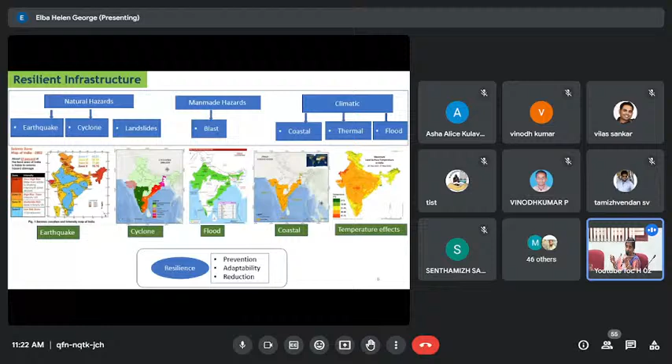Now going into the details of it, when we talk about resilience for earthquakes, choose ductile materials compared to brittle material, which will give more energy absorption to the overall system. So that is one way to bring in resilience for earthquakes in a building.

And there is a trend of using dampers which can absorb the shock or vibration during such events. Also there are some damping devices which are kept in between the floors or columns and beams, which also reduce the shock due to earthquakes. And in some structures we use bracings, and that also will lead to collapse prevention in case of earthquakes. So these are some of the emerging trends which we are practicing to bring in resilience for earthquakes if the structure is already built.

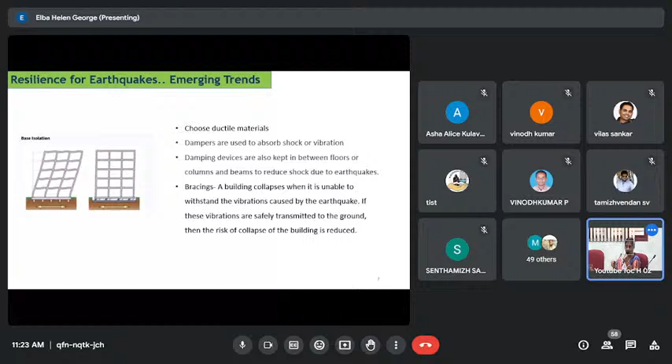Now cyclone. This cyclone aspect, if you can have a shape, you can bring in cyclonic resilience by developing different shapes. So this is one such example where CSIR-SERC has come up with cyclone shelters, and it is deployed in Orissa, and I think 23 of such shelters were built along the coast of Odisha. And whenever some cyclonic prediction happens, people used to shift to this kind of shelters.

But the point is, why we have to wait that long to shift the people? Why can't we build this kind of structures for the residences or the buildings which is existing in such kind of cyclonic regions? So that also needs to be emerged.

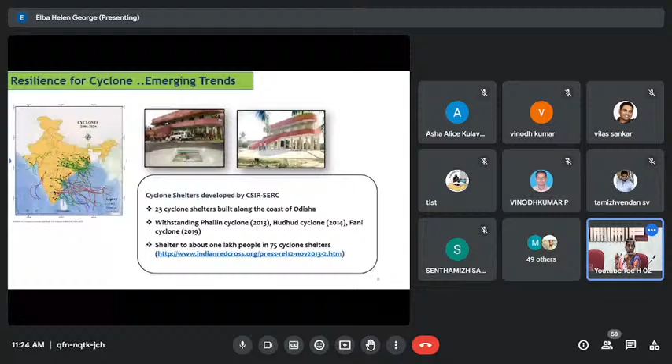Next, flooding, as I mentioned, the stormwater drain. But here good point is, I think till last year, we used to have only this cast-in-place construction practices for the stormwater drain construction. But recently, there is a lot of adaptation of the precast U drains for stormwater drain. And I think in Tamil Nadu, they have done a lot of coverage for the stormwater drain using this precast system in the last 2 years in the Jal Jeevan mission. And in many areas, this has found to be very effective.

So it is also a matter to be checked whether our roads have this stormwater drain passing along, so that flooding will not happen for rains happening in small spells. But in 2020, I think only 25% of the road network were having the stormwater drains. And due to this Jal Jeevan mission, this number has increased. But all across India, whichever state is getting affected by flooding, the stormwater drains need to be installed in a larger manner to tackle this kind of flooding.

Floodgates and flood barriers are not seen anywhere in India today. But in abroad countries, whenever there is a prediction for the flood, they used to just open it up, close it using the floodgates, so that at least some of the houses get protected from the flood events. So that also needs to be adopted and thought about for new innovative techniques.

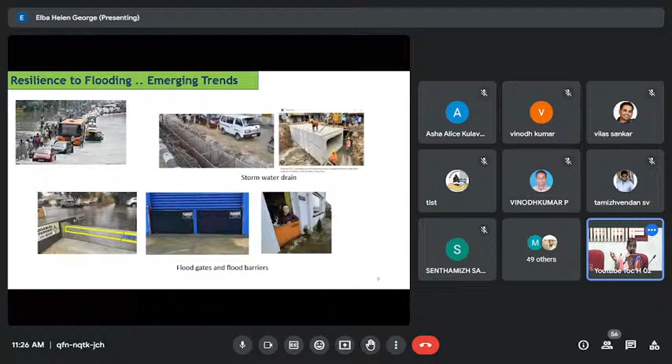Coastal climatic resilience, I'm sure you may be knowing that India has around 7,500 kilometers of coastal line, and 3.5% of the population is residing within 50 kilometers of the coast. So there is a domino effect being experienced by the coastal communities, that is spring tide coupled with ever increasing sea level. You can see in the picture, it's a picture from Ernakulam district itself.

So the salt water is surging inside the homes in coastal areas, and every year they have to do some repair for these walls, floors and all. So what is the solution?

Till now it is not addressed, I have been told recently, and we are coming up with new methodologies to address this kind of problems. Also these communities are using only mud bunds, and that is not effective during this kind of water inundation. So we also need to see how to prevent erosion, as well as how to prevent the water entering inside beyond a particular level. So those need different level of techniques so that this community's overall well-being can be improved.

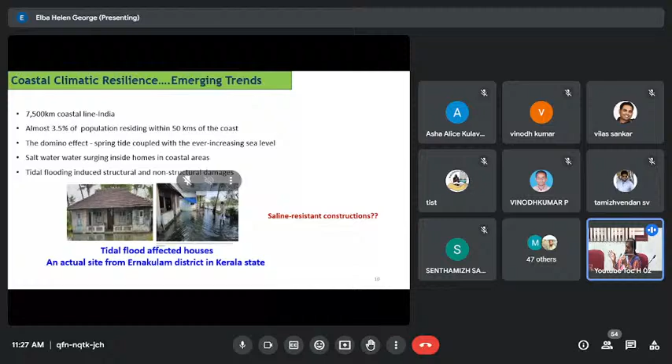So one of the options is saline resistant construction, but you may be knowing about waterproofing, but there is no waterproofing which has saline resistance. So it is not about the chemical, but it is the opportunity for us to come up with new saline resistant concrete in a cost effective manner for construction for these coastal communities.

Thermal climatic resilience, we need to adopt new building materials which have different rate of heat conductance, because if you see the temperature range across various states in India, you can see a difference. So you can choose the construction materials in different manner, which has different rate of heat conductance, and also there are possibilities to build building envelopes and attach to the existing structure or to the new construction, which will lead to thermal resistance. That is also being done in some of the places, and that is also an emerging trend which we are seeing today, and hope it will pick up in a greater manner.

We can also look into the paths which generally transfer thermal energy, mainly foundation walls, joists, and connectors, and bring in innovative methodologies there which will address the thermal resistance. We are very much aware of the dimensions of the brick, but it's not only the brick, there can be other materials also. We can select the area, thickness, and thermal materials which have the thermal conductivity to tackle that particular heat. Smart materials and phase change materials are being seen to provide thermal resistance to many construction methodologies nowadays, but that needs adaptation in our country.

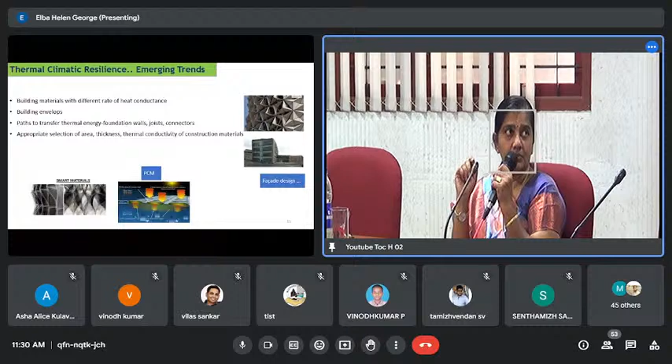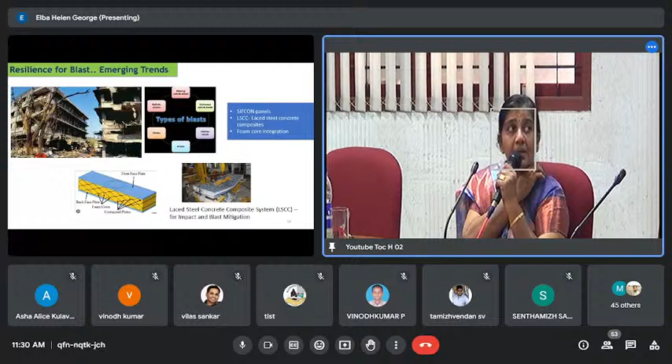Blast, there are many, as I mentioned, there are many types of blast. Some trends or materials you can use in this context: SIFCON, slurry infiltrated fibrous concrete, which has higher impact and blast resistance, and laced steel concrete composites are also there, which research has proven have improved blast resistance because of the more ductility and all. Foam core integration is also seen in literature, and it is claimed that they can also lead to better blast resistance. Next.

Okay, so that was some of the emerging trends. Now coming to the material which I was mentioning, textile reinforced concrete. Let us see how this material can be, we can call it a material for sustainable and resilient infrastructure construction. I'm sure most of you, this material will be new.

To give a brief understanding, it consists of a non-metallic textile. Let me tell you, it is not ferrocement, don't get confused with ferrocement. It uses a non-metallic textile and a cementitious binder. This non-metallic textile can be glass textile, carbon textile, PBO, aramid, and so on. The cementitious binder is not cement sand aggregate, but has cement, mineral admixtures, only fine aggregates, water, and chemical admixture. Here we are not using any coarse aggregate.

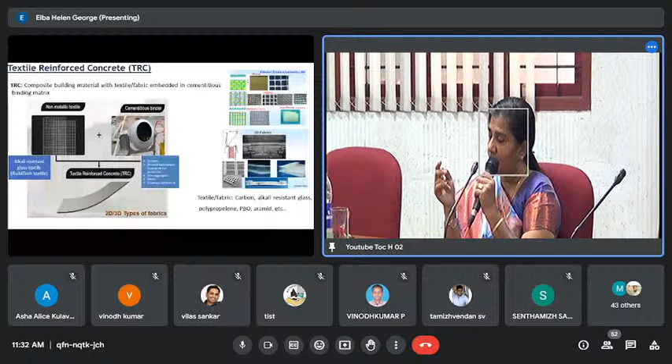Since it is non-metallic, we don't have to provide that minimum cover requirement of 25 millimeter. Because of that aspect, we can build thin elements of particular target strength and ductility requirements for many applications. On the right hand side you can see different types of textiles, like woven textile, knitted textile, bonded textile, and so on. There are both two-dimensional as well as three-dimensional textiles available. In India, we are yet to use three-dimensional textiles, but two-dimensional textiles have already come into certain applications that have mass application in this context.

To give an understanding about the performance of this material: when we talk about RCC, all of us know the Fe415 or Fe250 stress strain characteristics. But when you talk about textile reinforced concrete, it is not about the stress strain behavior of the textile, but about the stress strain behavior of the TRC composite as a whole. There are RILEM and ACI guidelines which are used today to characterize this TRC and see how the stress strain characteristics are, and from that we can derive the design parameters. That is how the design of TRC is done as of today.

You can see three stages of stress strain characteristics in this kind of material: uncracked state, multiple crack formation state, and stabilized state. If you want a conservative design, you have the flexibility and freedom to choose the straining value at which to stop the design. So whether you want a conservative or non-conservative design, you need to get this stress strain characteristic and decide accordingly. Also, if you keep increasing the number of textile layers up to some optimal number, you get more tensile strength.

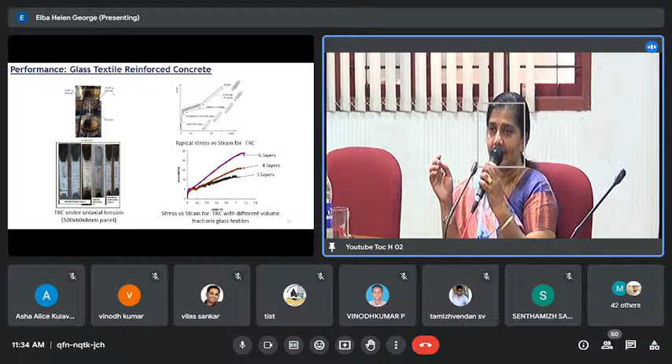With 3 layers of textile, you are able to achieve tensile strength of around 12 MPa. With 6 layers, you can achieve around 22 MPa. I'm sure all of you are aware that concrete has tensile strength in the range of around 2 to 3 MPa. So with TRC, you can achieve up to 20-25 MPa using glass textile and around 30-35 MPa using carbon textile. Under flexure, this is how it behaves: if you subject this TRC to flexure, this particular panel keeps on bending without breaking, and you get many multiple cracks when these panels are subjected to flexure.

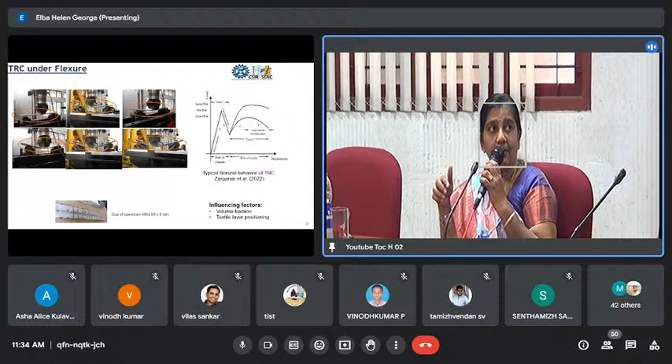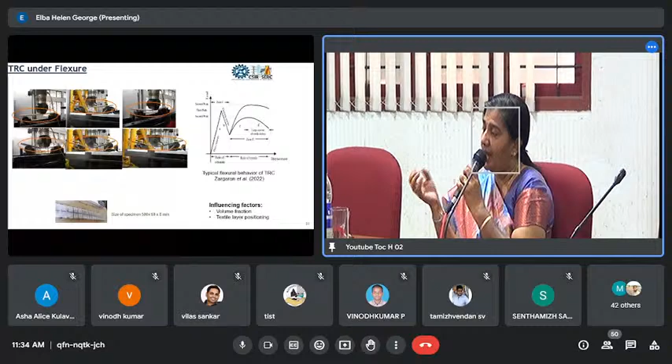On the right hand side, you can see the flexure behavior of the TRC. As you increase the volume fraction or the number of layers, the dip you get after the first crack formation will reduce, leading to a bilinear behavior at the end. So that is how you design depending on the flexural strength you are targeting for a particular component. The main thing to note is the number of layers, the volume fraction, and also how you position the textile in a particular cross section. So that also matters, but you have a lot of flexibility in how to do this design.

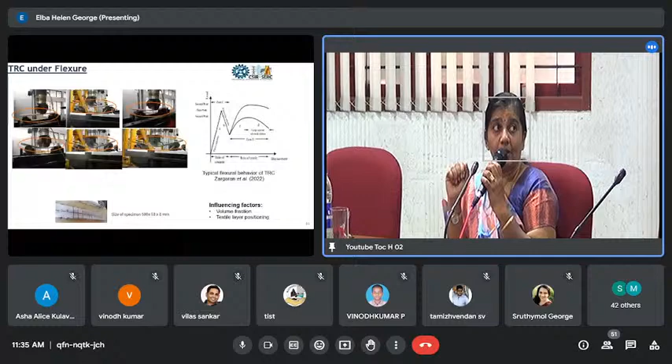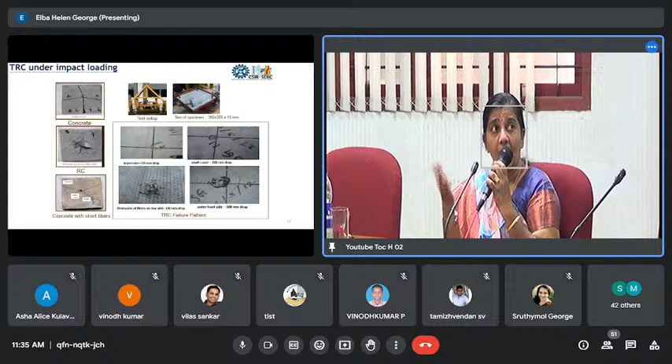Under impact loading, plain concrete just breaks into parts. Reinforced concrete with steel reinforcement gets scabbing. Fiber reinforced concrete shows a crack pattern spread across the length and width of the specimen. But textile reinforced concrete gives a very localized impression. So suppose you have a full facade system with TRC panels, and something gets affected by impact locally, you can just remove that particular panel and replace it. That is the kind of advantage this material has compared to other conventional materials in practice.

In a nutshell, we have n number of possibilities to choose the textile or the binder ingredient, and we can bring in alternate binders for the TRC, and do optimization for a standalone application, or integrate TRC with other materials to create other products. So high cost or low cost practices can be brought in based on the situation. Because of this customization possibility of TRC, we came up with a new production technology for which we got a patent granted. It's called Textile Reinforced Concrete Production Technology, a technology to produce various shapes of TRC products for various structural and non-structural applications.

When we started developing this in 2014, we used to describe it as a single technology for creating multiple products, like a multivitamin tablet, because one technology gives you multiple products.

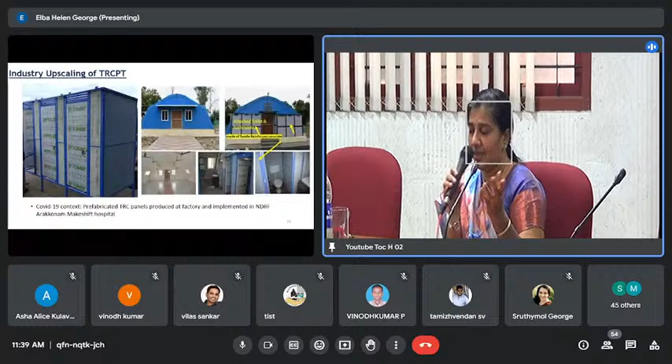That know-how has been transferred to industry, and they have upscaled into various types of structures. In the COVID context, these TRC toilets were implemented in a makeshift hospital in Arakkonam, and you can see the attached toilet and bathroom in this figure.

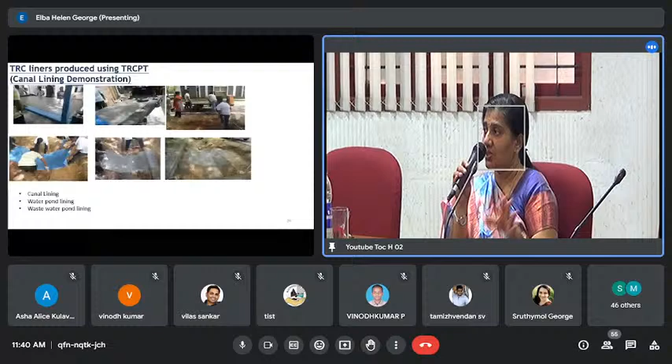Now using the same technology, you can also produce TRC liners, which can be used for various applications like canal lining, water pond lining, and wastewater pond lining. Here you need to produce that TRC sheet and bring it to the site. Whether it's an already damaged canal or structure, you can have this liner, and also you can have the liner with greater thickness if it's new construction.

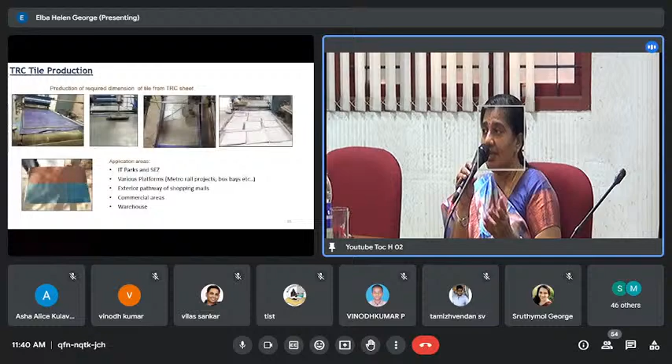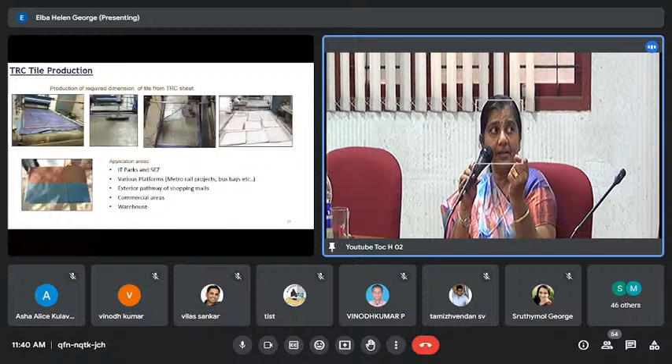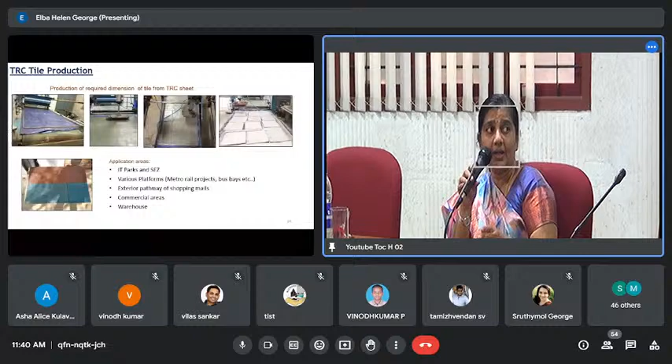Tiles are yet another application. Heavy duty tiles can be produced using TRC of a thickness in the range of 15 millimeters itself. The current practice is to have bigger tiles for heavy duty applications, so if it's a warehouse and some tile gets damaged, you have to replace the full part of it. In such situations, having a smaller dimension is the better option.

Also, for non-load bearing panels, you can integrate TRC panels with EPS like expanded polystyrene, or calcium silicate, or gypsum, which gives thermal resistance to the overall system. So TRC is a well adapted material with other materials, either as a whole or by combining with shear keys and so on.

I just wanted to show you the various possibilities which are emerging, and also you can think how it can be taken forward in a bigger manner. Load bearing-wise, TRC alone is not load bearing if it's 15 mm or so using glass textile. But if you're using carbon textile, yes, you can call it load bearing. With glass textile, what you can do is combine it with other materials.

So in order to have a 100 ton capacity wall panel system, these TRC skins are integrated with profile steels with embossments, and self-tapping screws were used to connect those two. We developed a spacer system to connect the two sets of panels, and put together the system could carry a load of more than 100 ton. So it's also a material which can be combined with other materials for improving strength, bringing it into a load-bearing panel.

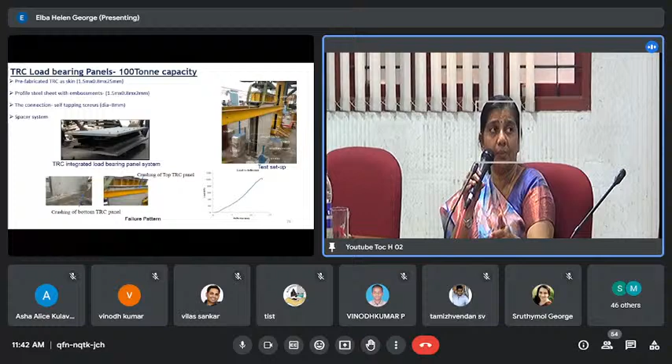There are many application areas, like you can use it as infill, for many industrial buildings, multi-story buildings, or external facades. But the main advantage is easy erection at site, because the weight is less compared to what we used conventionally. It is less skill intensive, anybody can manufacture it, less labor intensive, and allows fast track construction practices and so on.

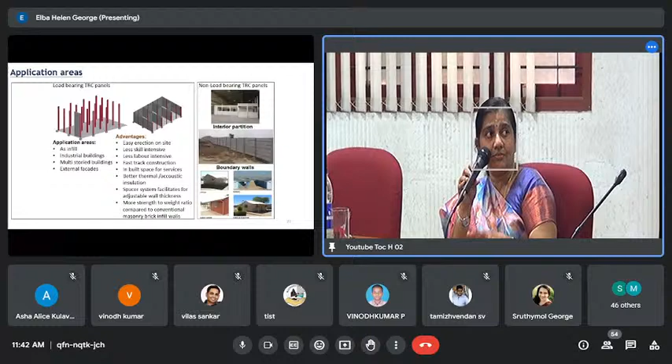Some of the structures you can see here. This is yet another industry upscaling of what we have developed.

This wood, like whatever interior design we used to have for our homes, especially if you look at the kitchen area, more than 6 years you have to do some repair for that kind of area where the water is falling. Earlier we used to have concrete slabs, but with this TRC you can see it's 12 millimeter thick slabs. Now one company is also doing TRC decor of the interior design with TRC modules and slabs for the overall building.

It is also being used for building construction, wherein you can see TRC panels brought into the site, and they can be just implemented, leading to faster construction of single story buildings. For multi-story buildings, research has to be done. We are very glad that this was done by one MSME industry in Rajapalayam, where they tried out our TRC liner technology for house construction.

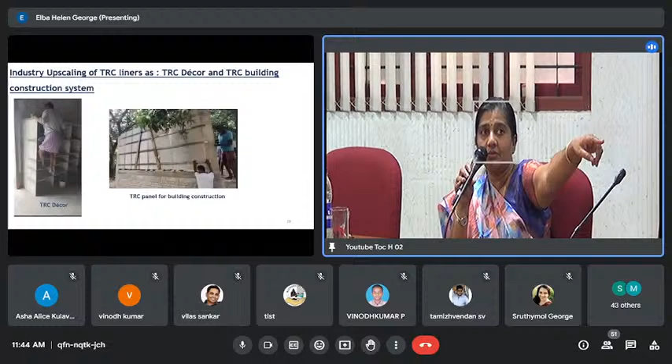So what we have done is made two flaps of the single panel. Because of that flap alone, bending moment demand reduced to one-third. So you have the flexibility to have different shapes, which leads to better benefit in particular applications like this boundary wall.

This technology has been transferred to L&T, and they have done a trial stretch in Delhi-Mumbai Expressway. Also recently they have completed a trial stretch at Tiruvallur railway station using these textile reinforced concrete panels.

Yet another application is crash barrier systems. In the Indian context, if you see city roads, you can see median barriers which are being built in a cast-in-place manner. When a vehicle collides against it, the vehicle gets seriously damaged and passengers get injured. When we characterize this textile reinforced concrete, we see it is a material which can absorb more energy compared to conventional steel reinforced concrete.

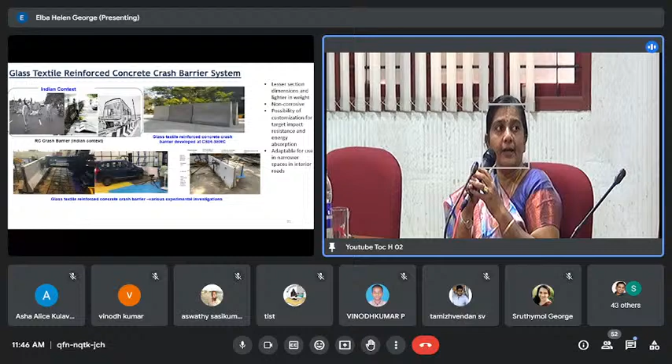So we thought, why don't we try to develop this kind of crash barrier system, which may suit as median barriers. Towards that, it's a precast system. In the Indian code, there is no test methodology described for the crash test of this kind of barrier, because we are used to only reinforced concrete barriers.

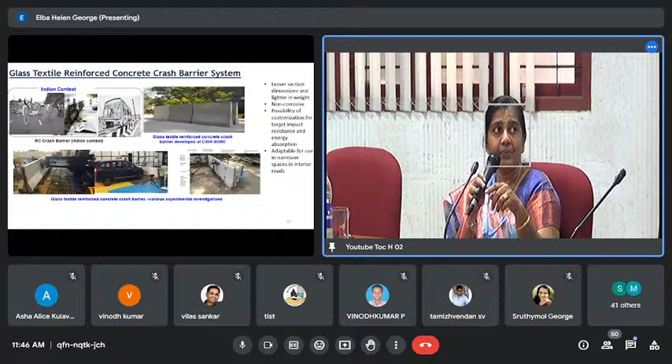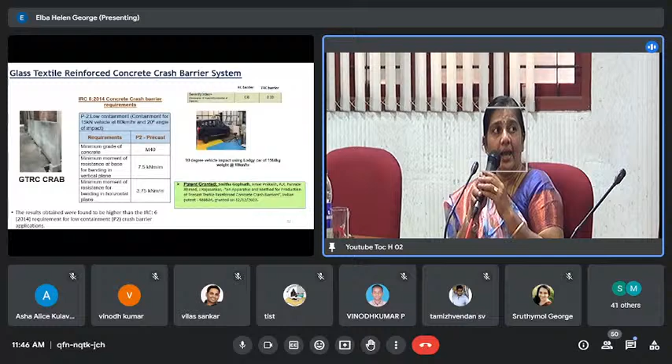But there is an IRC code which tells that it should have a particular design moment resistance in these areas. So we tried to build that kind of moment of resistance into the configuration, and this product development was qualified for low containment crash barrier applications.

So for this also we got a patent granted. Now we are just waiting for a real crash test to happen on this particular development so that it can be put into practice.

Coming to repair, retrofitting and rehabilitation, it's a well-known material abroad for strengthening of masonry and concrete structures. This is mainly because of the substrate compatibility of textile reinforced concrete, since you don't need any additional anchors or screws to fit it to the existing structure. So if you have a plate of TRC, you can just paste it onto the existing wall.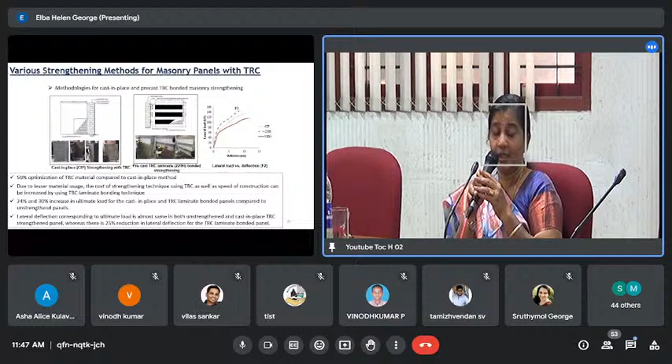That will increase the shear demand of the panel system, so it is a best suited material to impart earthquake resistance for existing structures. You can also impart enhancement in strength through the plastering thickness. So instead of normal plaster, if you have a TRC cast-in-place strengthening methodology, you can have the panel strengthened using this material.

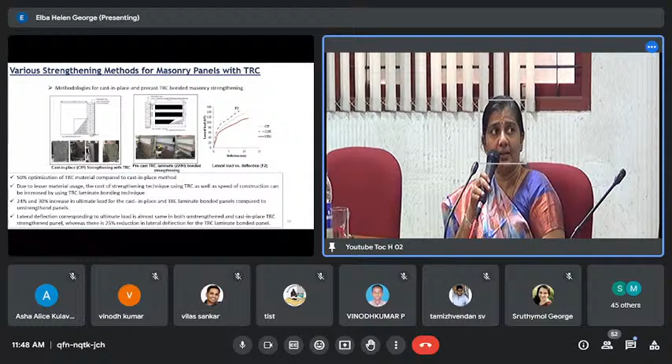If you do this laminate bonding methodology, we see there is 50% optimization of the TRC material compared to the cast-in-place method shown on the left side. There is a 24 to 30% increment, and we can design based on the enhancement requirement for this kind of situation. There is also a comparison of how this precast bonding and cast-in-place methodology works for these applications.

This is yet another application for which we also have a patent - how to strengthen an existing concrete beam and masonry wall in a plastering thickness. There are certain characteristics of the textile through which we can improve the efficiency of the textile layer when we do the strengthening, as shown in this figure.

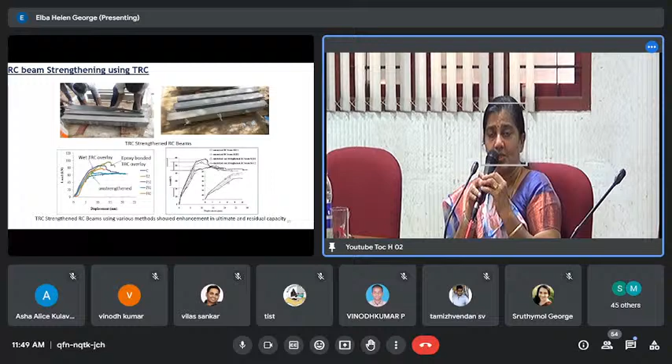We can also bond the TRC cast-in-place layers onto the existing beam, or bond it with epoxy. That will lead to enhancement in the strength and ductility characteristics of the reinforced concrete beam which is already in place, and it is a material which can be opted for strengthening of RC structures.

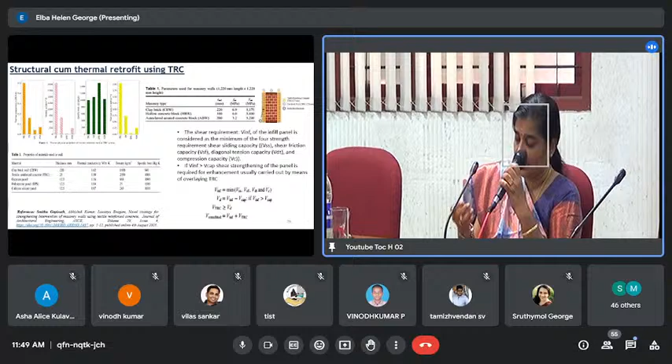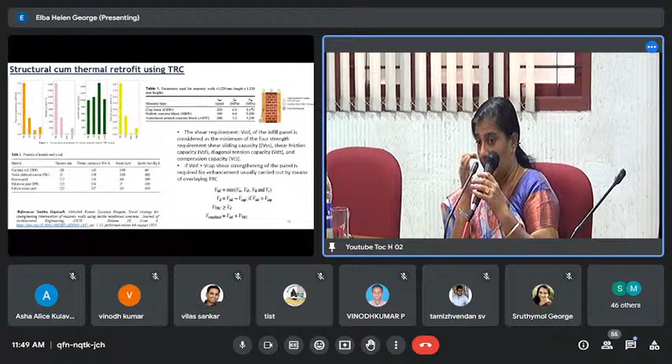Coming to structural cum thermal retrofit, it is a recent study wherein we worked out whether TRC alone, or TRC integrated with calcium silicate or EPS, can lead to structural cum thermal retrofit possibilities. We also tried out whether this conceptual strategy will work for clay brick wall, hollow blocks and AAC blocks, targeting a particular enhancement in shear demand and a particular enhancement in thermal characteristics, and which system should be used.

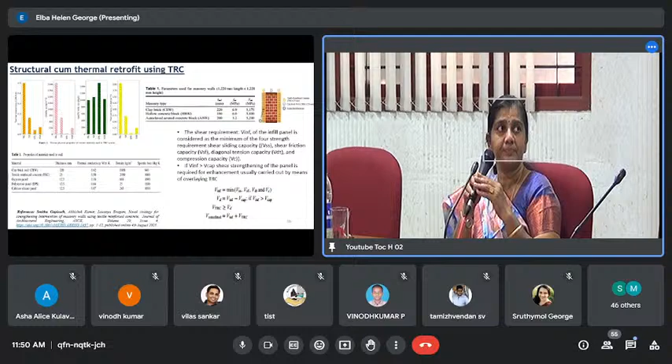We derived a methodology that was proven to be successful, and this is a proof of concept which tells you that it is a material which can be thought about for this structural cum thermal retrofit. If you have a particular requirement of some percentage enhancement in strength and a percentage requirement in thermal performance, you can choose the materials and design them accordingly, and we can get the targeted performance.

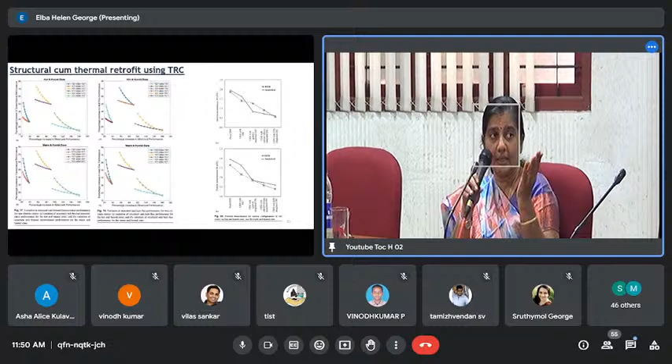Which combination will perform better was also studied using finite element analysis and analytical methodology. This material and its combination with EPS and calcium silicate was proven to be suitable for clay brick wall, AAC and hollow blocks. Yet another application which we completed recently in Pune is a decentralized wastewater treatment plant unit.

This was an Indo-German collaborative project. Our industry partner implemented it at a Pune site. At SERC, we carried out full finite element analysis, prototype development, and full-scale testing for its qualification for use.

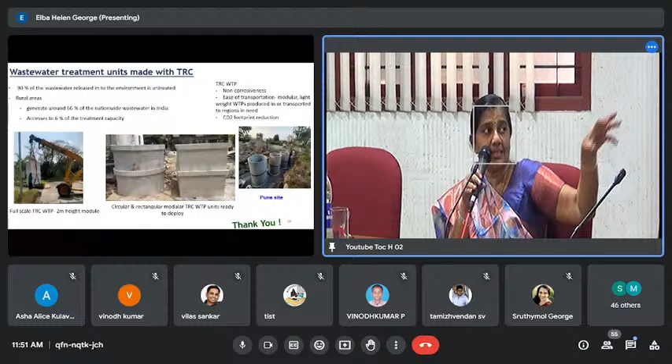as a decentralized WTP plant. Both circular and rectangular tanks shown here are made of textile reinforced concrete. On the right hand side you can see how the factory implemented it, with connecting pipes where we simply drilled holes for the connection. This kind of decentralized system is very much needed in rural and semi-urban areas for wastewater treatment units.

We recently completed this project, and now we are doing a stormwater U-drain using textile reinforced concrete. L&T is our industry partner, and we will be completing it in the coming July.

We are also trying out waste fishing net as reinforcement in textile reinforced concrete, because ocean pollution is also a matter of concern. Though it's not given much importance now, in the coming 5 or 10 years this matter will be taken up. While developing products like the U-drain, hybridization of the waste net through some modification method also led to very promising results. That research is ongoing in our institute.

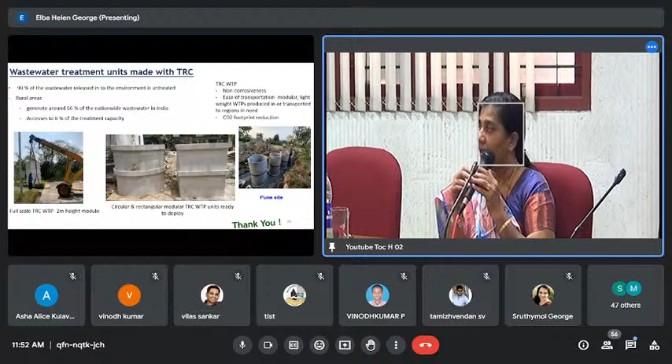So I think these are the developments we have done with textile reinforced concrete. Thank you all for your kind attention, and I'd like to address any clarification specifically related to TRC.

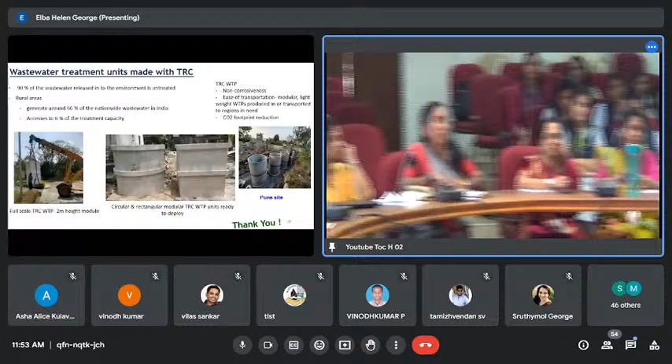Ferrocement uses chicken mesh or steel mesh, while TRC is non-metallic textile. It's about the reinforcement binder and the stress strain characteristics.

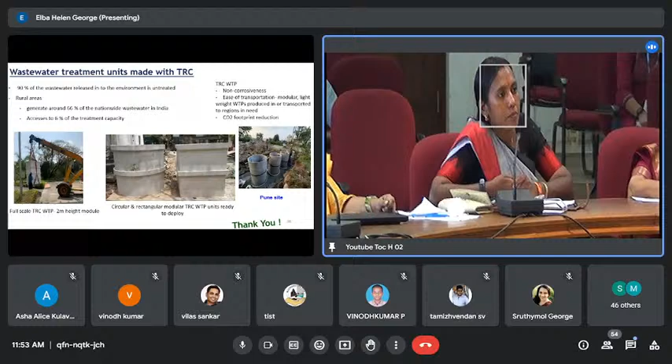TRC is better because, as shown in the uniaxial tension and flexure tests, the micro cracks are very hairline with multiple cracking. That kind of hairline crack width you cannot get in ferrocement.

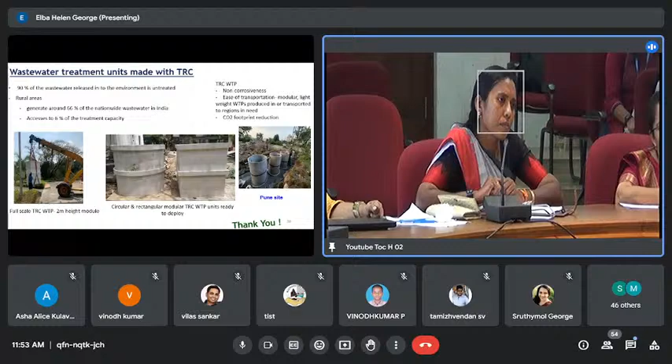You can bring down the crack width by staggering the textile positioning, and you can choose the textile mesh size. If you want to construct a very durable structure, you can use a lesser mesh size. Cracks will only occur within that particular mesh opening area, but with lesser crack width compared to a mesh with a larger opening.

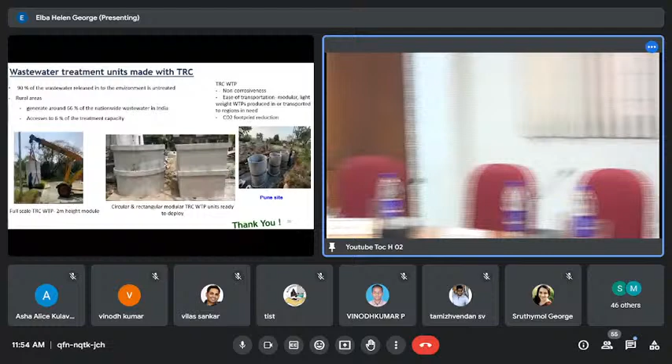Regarding water binder ratio, mostly we used 0.4 water binder ratio, with a super plasticizer included. COV will be around 10 to 15% in most cases, so whenever we do characterization, we should have at least 5 samples.

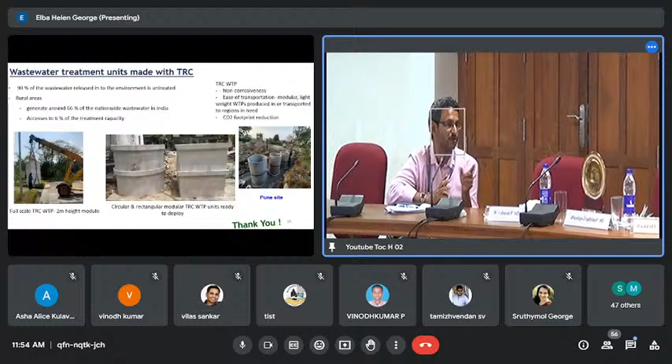Yes, because coating was done manually. If it was done at a factory, COV would reduce, since manual coating always introduces more variability.

Yes, durability studies were done on this. For the waste fishing net, we applied additional coating using some material and hybridized it with glass textile. Fishing net alone will not qualify for structural purposes, but when hybridized with glass textile it becomes a new textile system that can take load.

We can increase it, because for the stormwater drain we have two configurations: 500 by 500 U shape, and another 800 by 800, where the thickness is 80 millimeter since it has to qualify for HMV application.

You can increase the binder thickness, but beyond 4 layers there will be delamination. However, you can bundle it: 4 layers, then some binder, then another 4 layers, and so on. The same binder will penetrate into the mesh sizes.

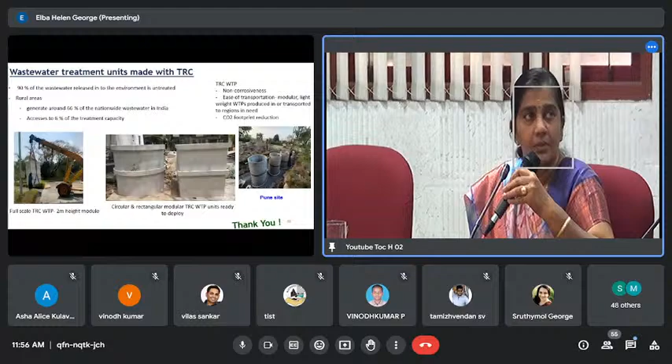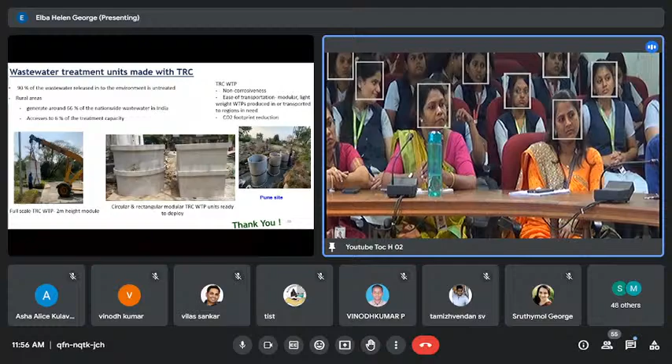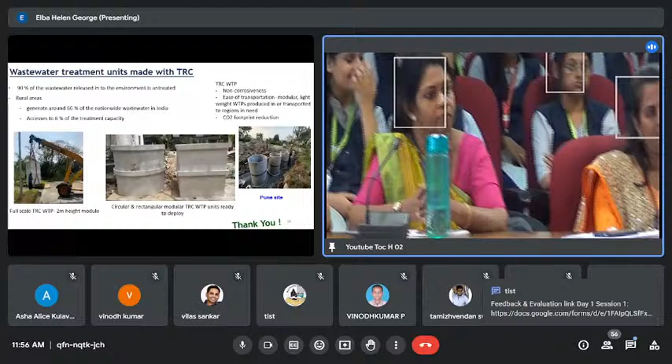For canal lining versus building construction purposes: for canal lining, the cost ranges from 350 rupees per square meter to 650 per square meter. But for a U-drain, it would be around 800 to 1000 rupees per square meter, depending on the application and design.

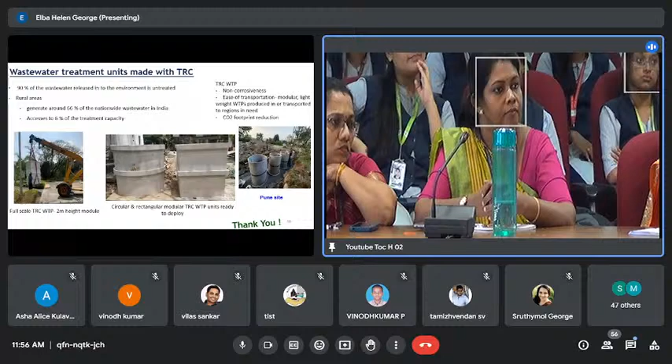For boundary walls, I was told by the industry that they achieved 60% cost effectiveness using TRC compared to pre-stressed concrete walls.

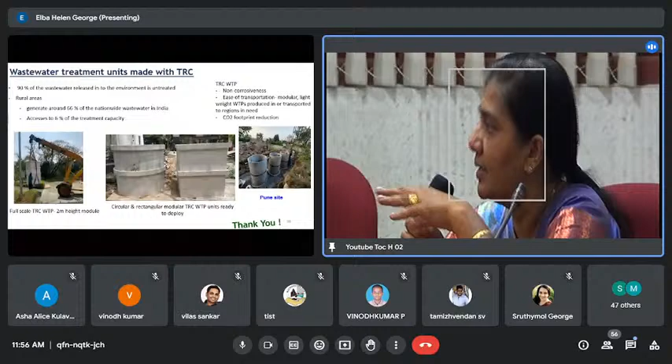So it's not there yet, but BIS has recently come up with a working group to develop guidelines for the use of TRC, I think about 2 months back.

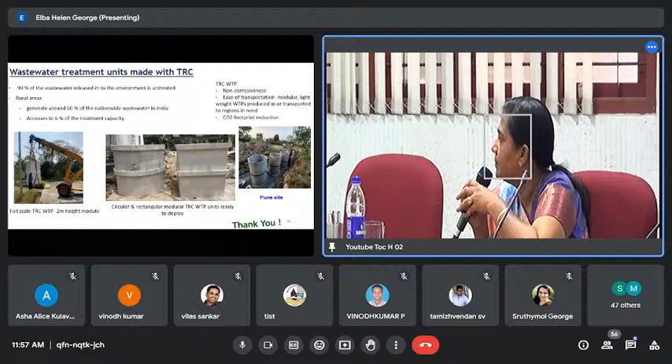For wall panels, 20 mm thickness panels were used. Railways used 40 mm panels, but for the Delhi Mumbai Expressway it was 20 mm.

FRP requires polymers, whereas here it's a cementitious system. FRP is always over-predicted, because if you want only a 20% increment, your FRP sheet will give you 40 or 50%. But with TRC, if you want 20%, you can design exactly for 20%.

Calcium silicate, gypsum and EPS - these are the three that we have tried out.

I think for coastal resistance in Germany, they have considered aluminum panels along with TRC sheets. It's like an adaptive envelope or something they are calling it.

From about 10 mm to 15 mm, reducing the thickness, because that much is enough to function for that particular requirement. So it can be fitted as a facade.

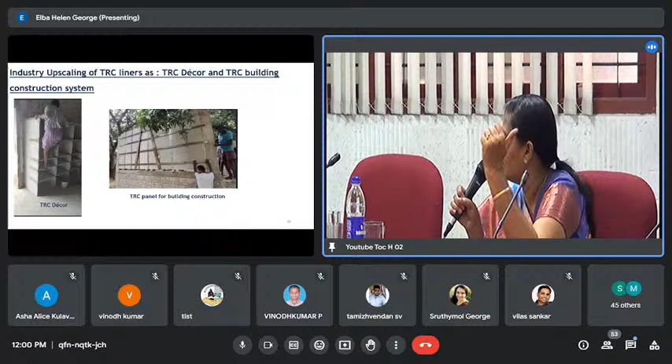But if you need additional anchorage, you can provide it - delamination of the concrete to TRC is not happening. But within the TRC, between the textile layers and binder, delamination can happen if the number of layers is more than 4 in a particular case. Because if the binder has a bond strength of around above 2.4 MPa, it will not debond from the concrete. So if your binder has that much bond strength, the chances of debonding are less.

No problem, additional safety. ACI has one recommendation which will tell how many number of layers you have to put if you know the design characteristics and design parameters of that textile and TRC.

Yeah, overlay. If you want to increase the shear strength, you have to calculate what is the shear strength requirement and how many number of layers and what thickness can provide that. So if it is bending moment, again you have to calculate that way - it is number of layers and the thickness.

The full thing is there. That is what somebody was asking, right? That E value for concrete and TRC is in the range of 25 to 28, whereas for FRP it is around 70. So you are attaching something of 70 GPa to 20 GPa.

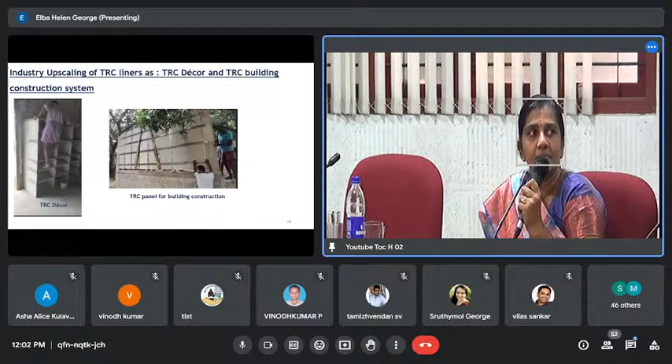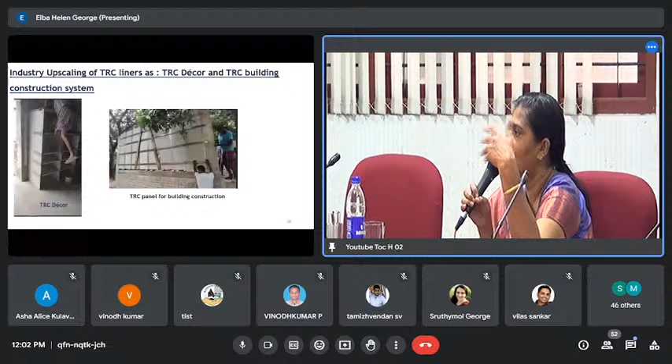So when they told people TRC can be used like this, the first question was: what will happen if somebody sits on it? Because if you see some 15mm, nobody psychologically accepts it. So this industry used to show this video wherever they went for this kind of promotion, showing nothing happens. We also had another photo where a lot of TRC panels were transported in a petty auto, as we call it here - it was a bumpy road and the panels were just moving around, and when it reached the site nothing happened. The workers at the site were very happy, saying, sir, nothing happened, we were thinking it will break. So that and all you will see only if you see it.

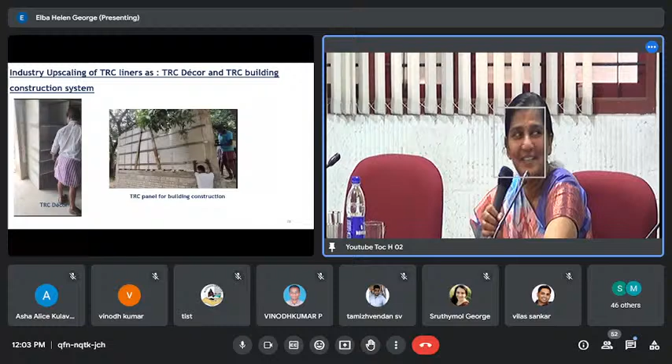Termite resistance - like wood and all, termite attacks are more common. So in this material that's avoided, and also I think maybe if you wait 2 more months, they will bring a matte finish into this kind of decor. So they have some plan to match it to the aesthetics of wood using this TRC.

Archana blocks in Rajapalayam - so we transferred this basic know-how, but they made TRC decor one of their products.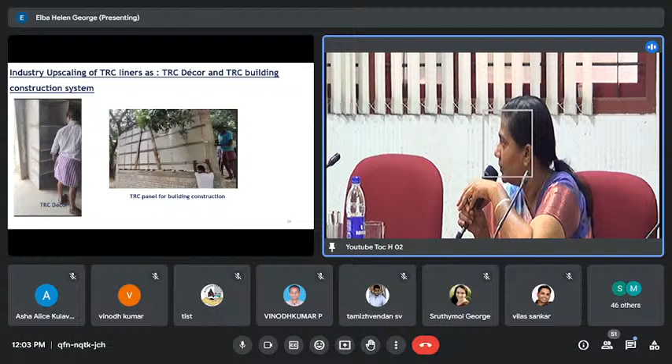Yes, yes. Yeah. Model, yeah, yeah, sure.

Not aerated, yeah, but I think also Mobasher has done some work on aerocon panels along with aerated concrete and TRC for some impact resistant panels also. I think there is a research team working on this at Arizona University. Yes, yes. But only one institute is doing it, so you have to see what the results are.